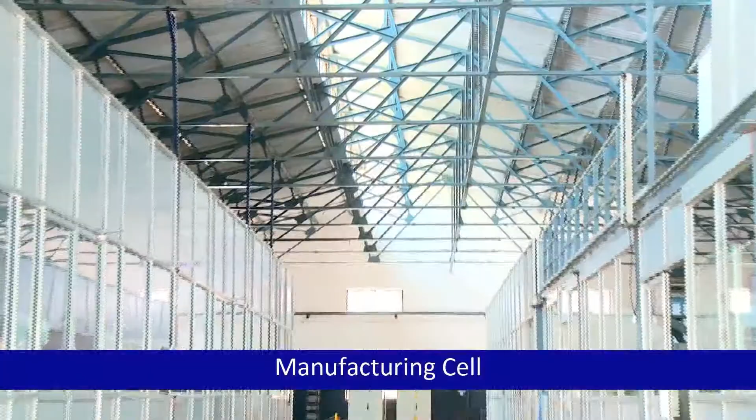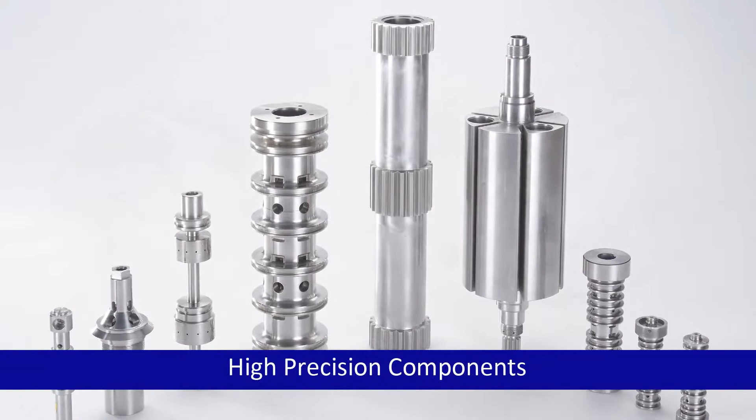Since its inception, ATC is the trusted partner for ISRO in all the PSLV, GSLV, Chandrayaan, and Mangalyaan missions, and a feather in our association: we are working for the prestigious India Maiden Human Space Program, Gaganyaan.

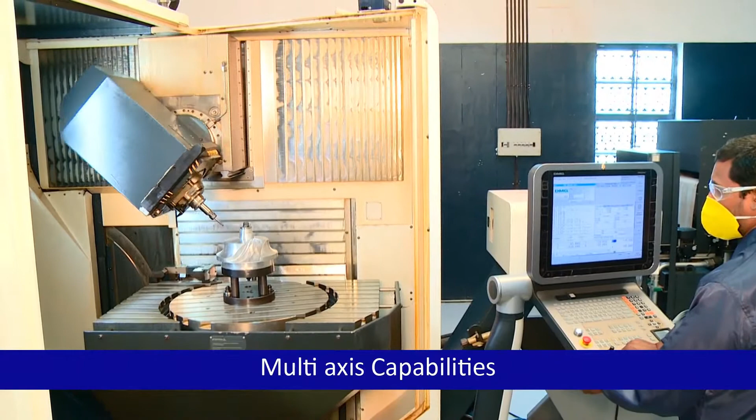Established in manufacture, special process, assembly and testing to produce motors, actuators, control valves, sensors, solenoids, and power takeoff shafts.

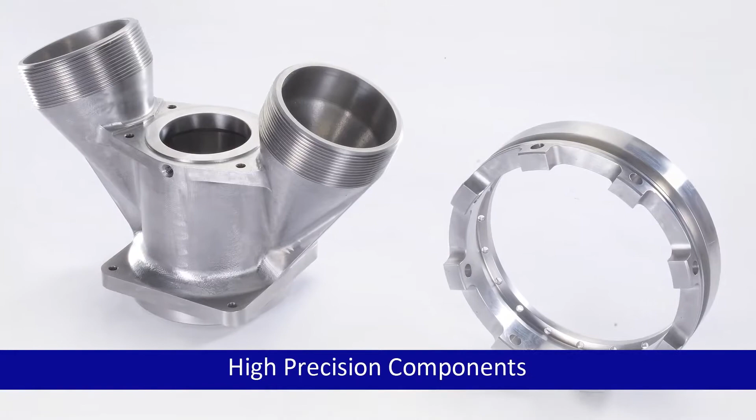The latest venture into manufacture of gimbals for electro-optic payload and retractable landing gear systems for UAVs set a path to become a system integrator.

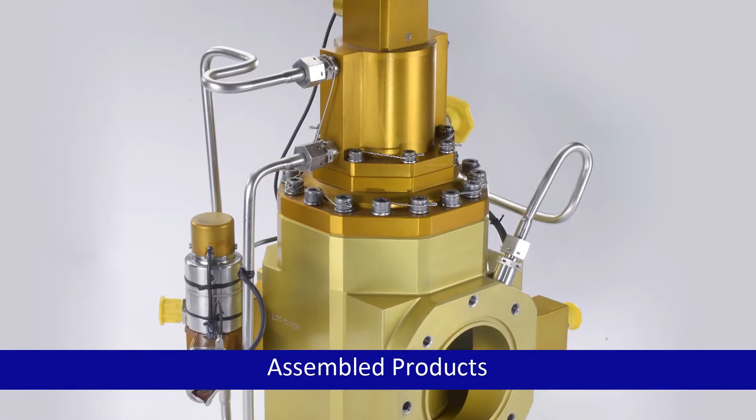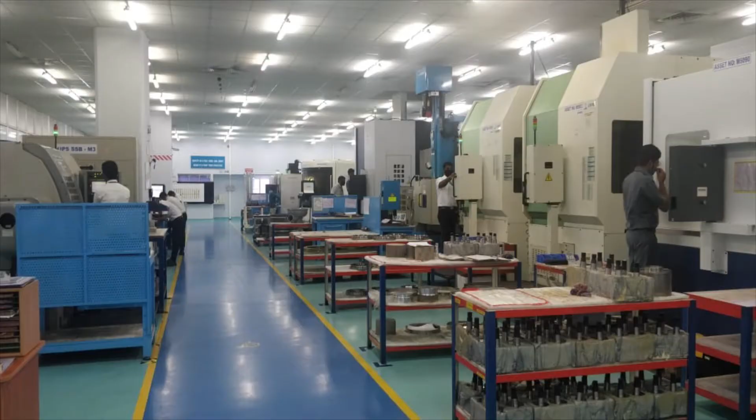In 2010, LMW ventured into the aerospace industry, leading to the birth of a new division, Advanced Technology Center, a one-stop solution for the aerospace sector meeting world-class standards on quality assurance, certified by international quality agencies to serve the aerospace and aviation industry.

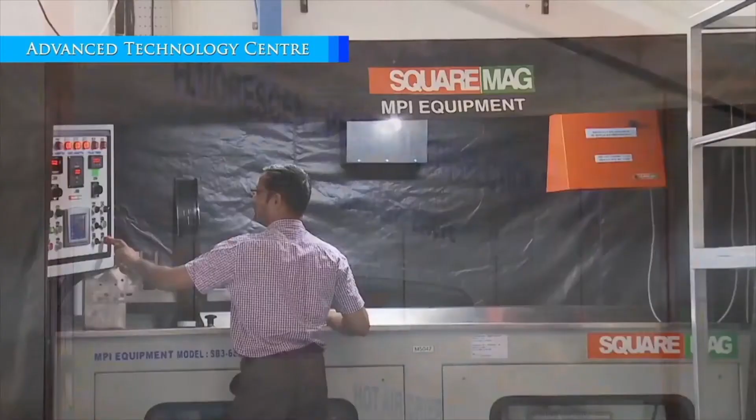Manufacturing precision machine parts for engine, structural, sheet metal components and sub-assemblies, with an added valuable special process for surface treatment.

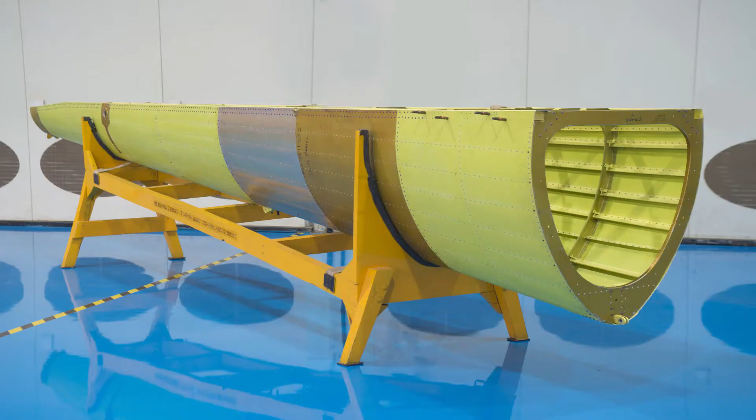LMW is progressing in its foray into aerospace by establishing a vertical for composites at its Advanced Technology Center to complement the manufacturing infrastructure for metallics.

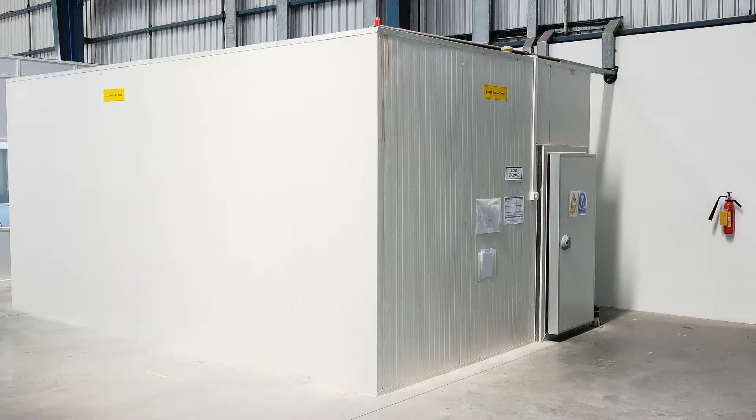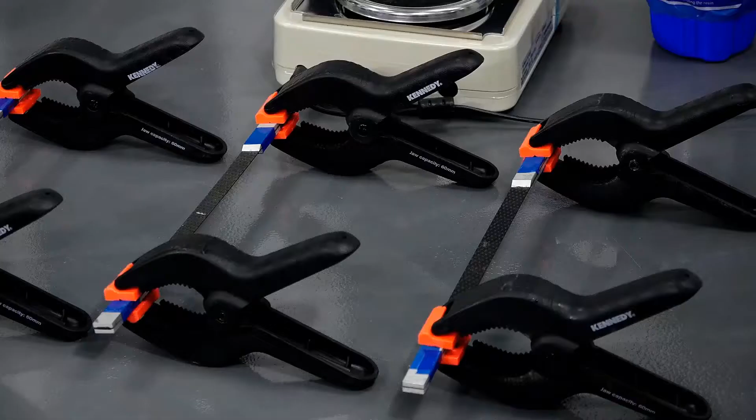The perfectly integrated state-of-the-art facility will put LMW in the Premier League to design, develop, analyze, qualify and manufacture very demanding aerospace composite structures. A unified approach to build the facility, a competent team and an effective quality management system has amalgamated all the requirements.

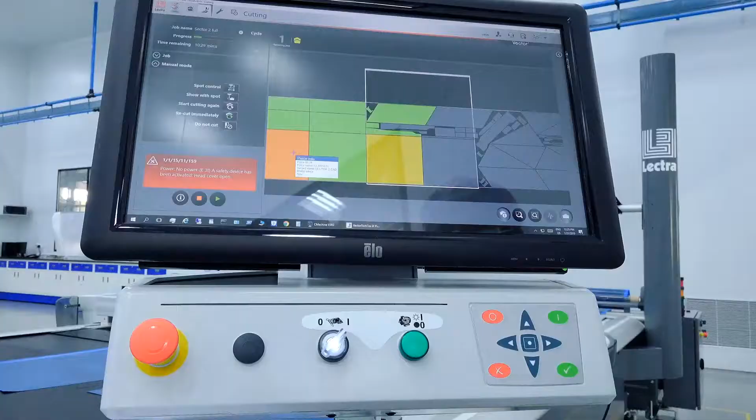This has brought forth an ideal environment and work culture to meet the expectations of AS 9100 and NADCAP standards.

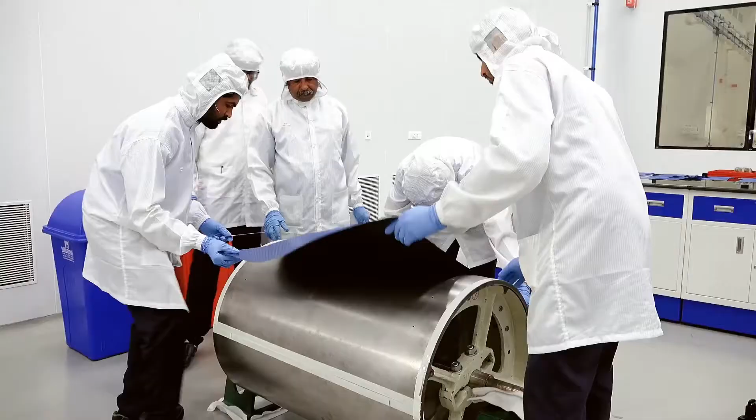A CNC pre-preg cutting machine is deployed to prepare the layup kits. Two clean rooms of ISO Class 8, one of which is convertible to Class 7, are maintained in ideal conditions for layup activities.

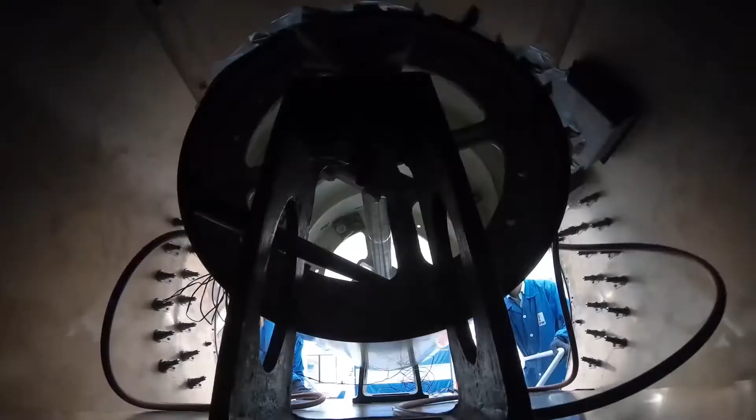Two autoclaves with a computerized control system will assure precise execution of curing cycles.

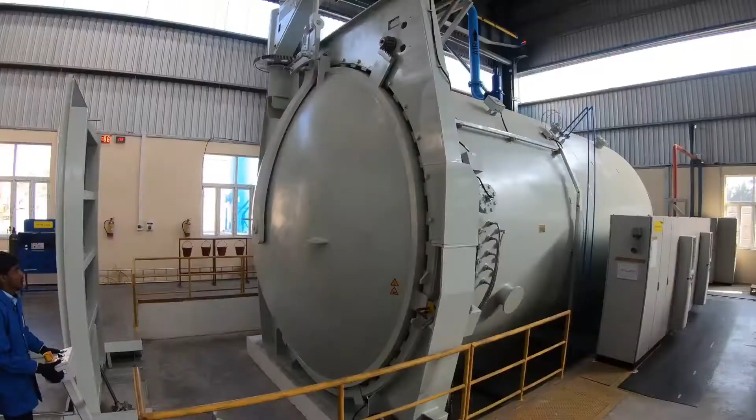A universal testing machine of 100 kN capacity and ultrasonic A-scan form part of the quality monitoring activity.

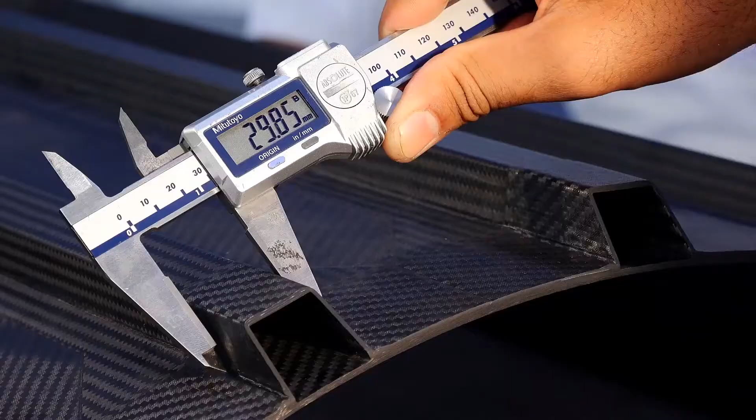The facility has a high bay for assembly of large composite structures for launch vehicles and aircraft.

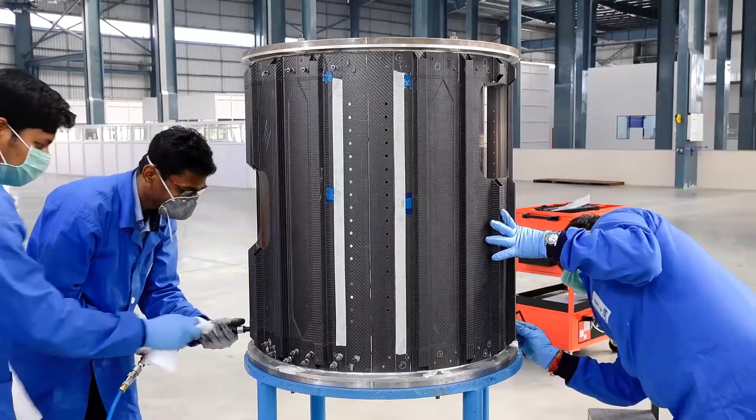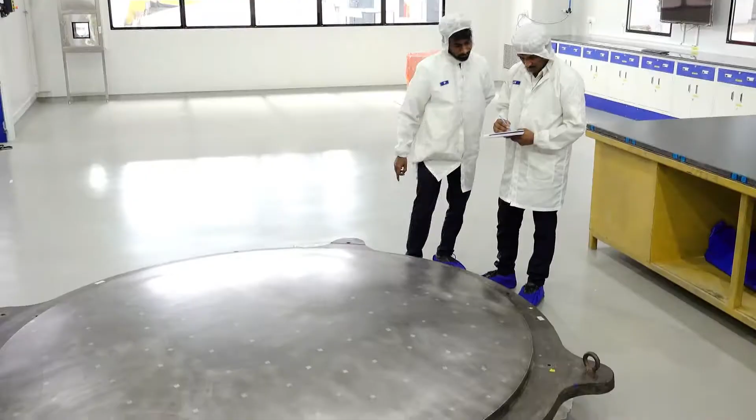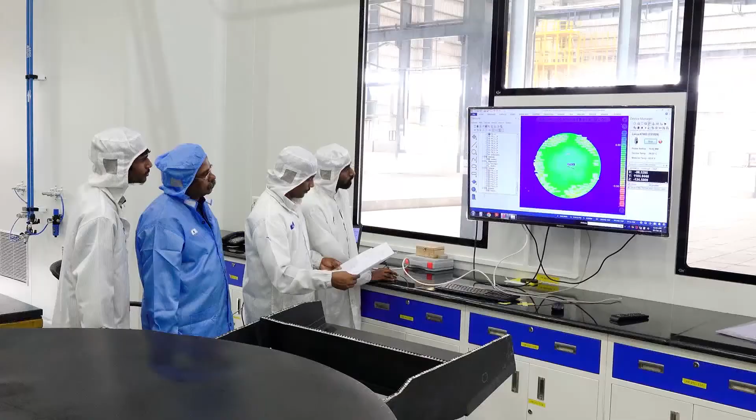The team has evinced its potential by realizing diverse and demanding composite products. Notable among them is a deployable CFRP-shaped antenna reflector for communication satellites, requiring high-profile accuracy and stability under thermal and inertial loads. Translation of crucial design aspects into product and methods to achieve and measure the profile accuracy has been mastered by the team. The dish is of sandwich construction.

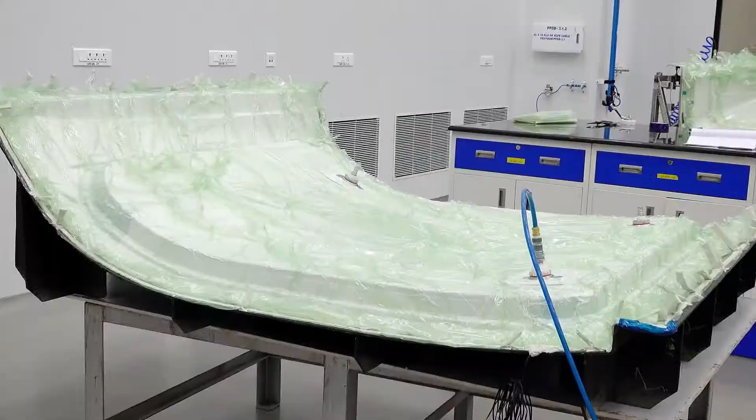Hindustan Aeronautics Limited, the premier organization in India to build aircrafts and helicopters, has engaged LMW to produce complex and intricate contoured structural components for its advanced light helicopter.

These components are processed in a well-controlled environment by vacuum bag molding method and subsequently cured in autoclave. One of the typical components is the cowling panel assembly top engine, a partially sandwich construction.

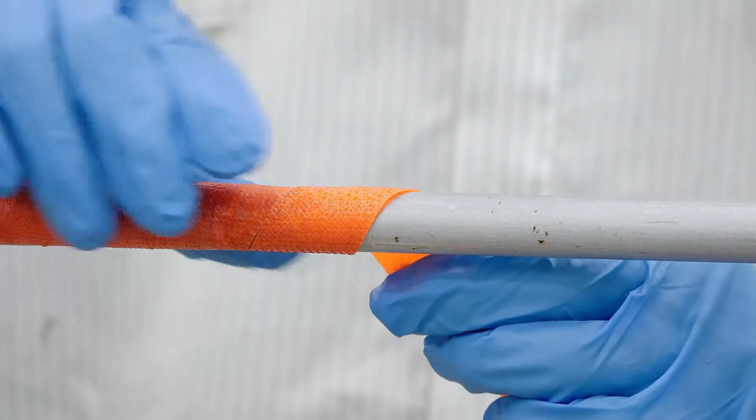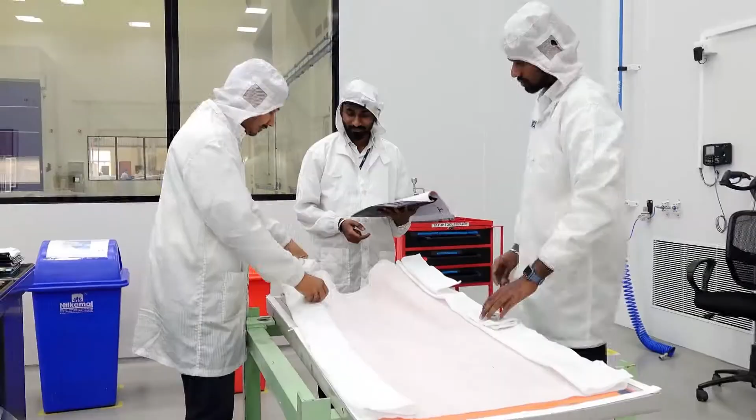Other typical components are the seal support for the door assembly and the cowling panel, which is again a combination of sandwich and monolithic construction. Concurrent with the processing of such components, test laminates are also processed to extract control coupons and verify the quality of processed components.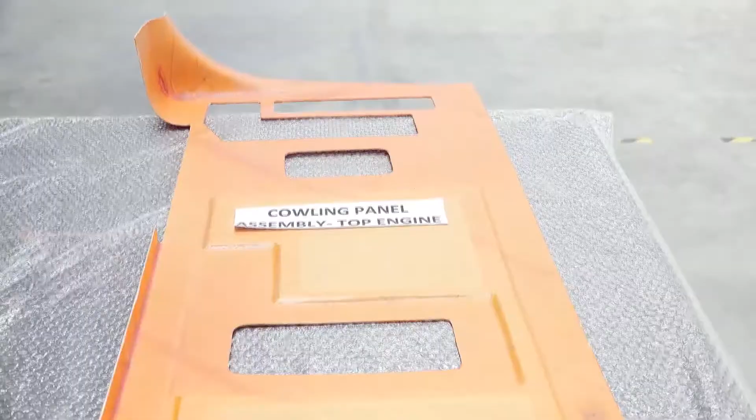A glimpse of the finished products like cowling panel assembly top engine, Kevlar tubes, cowling panel assembly controls, and a seal support assembly for the door stands testimony to the finesse of the workmanship.

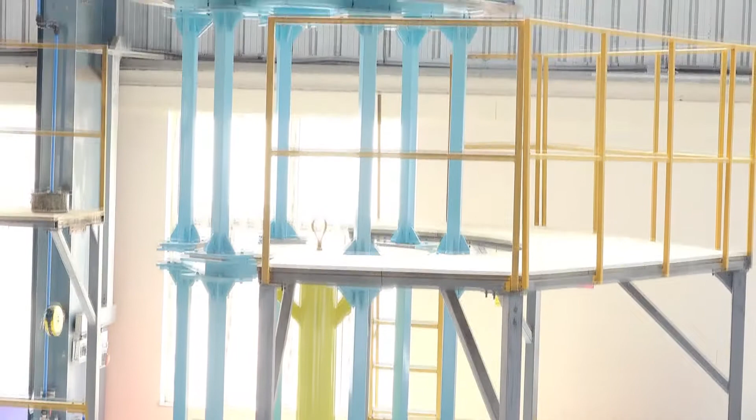The metallic sandwich cylinder for the small satellite launch vehicle is being developed for ISRO. The panels of the shell, using thin aluminium sheet as a skin and aluminium alloy honeycomb core, have been molded and cured with due surface treatment.

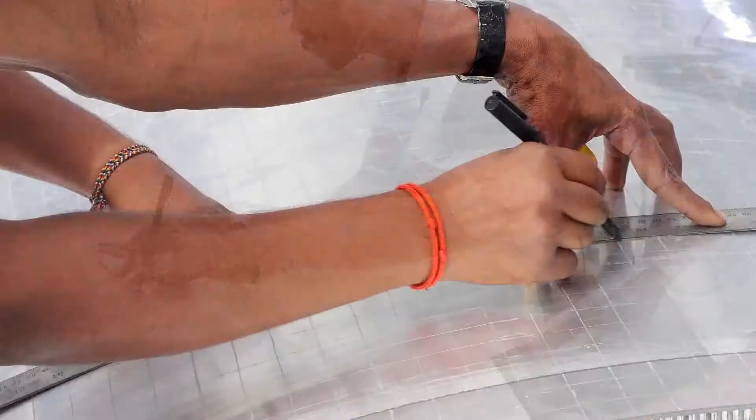Segmented cylindrical panels are subjected to non-destructive evaluation and trimmed to suit the assembly. The assembly has been realized with splicers connecting the cylindrical segments being fastened to the end rings.

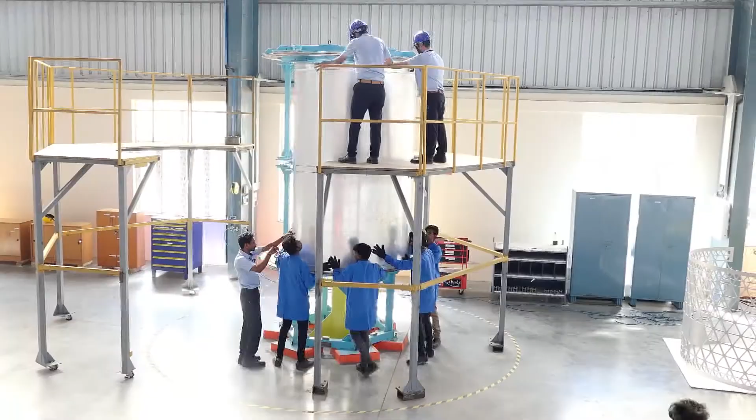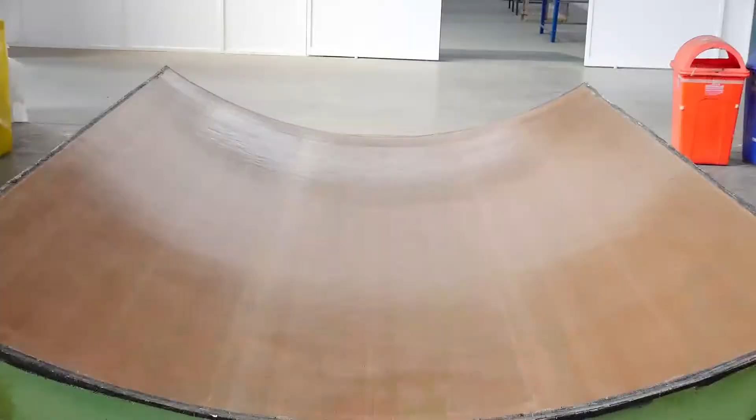Another major highlight of the activities currently at LMW is the realization of composite payload fairing for GSLV Mk3, India's largest launch vehicle. This activity involves design and manufacturing of composite toolings, the processing of sandwich panels of different configurations, and their assembly into two halves of the payload.

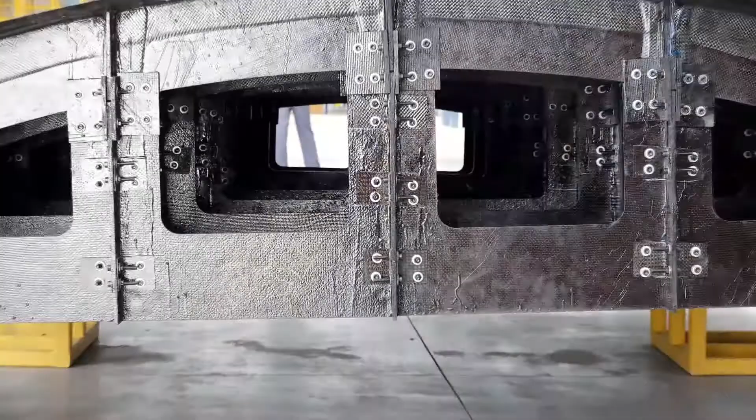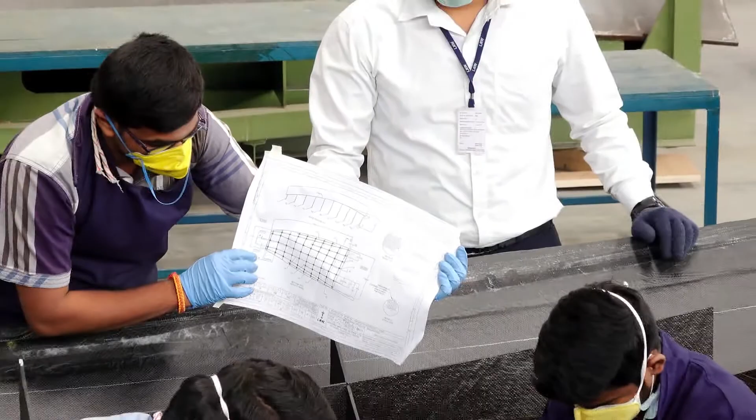The composite tools for realization of panels for the cylindrical segment of the OPLF has been realized in-house and inspected for its surface accuracy. Similarly, the composite layup tool for the ogive segments of OPLF is also being built up in composites. The panels realized using these layup tools will be trimmed and assembled as payload fairings using the assembly jig.

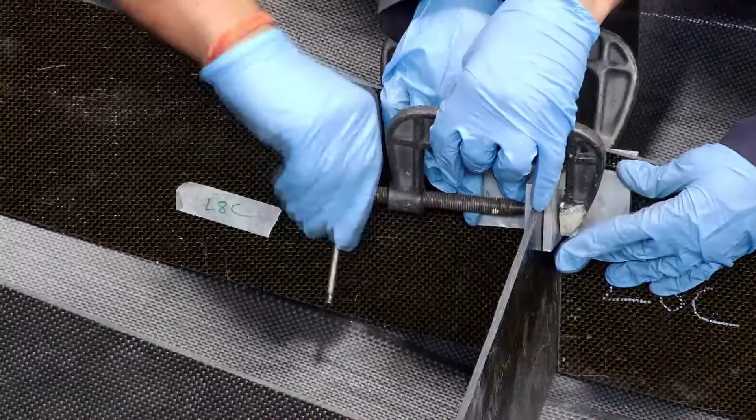The diversity and complexity of the products being realized at LMW has raised expectations of potential customers. The facility will be further augmented by installation of a hot air oven, and a CNC machining center.

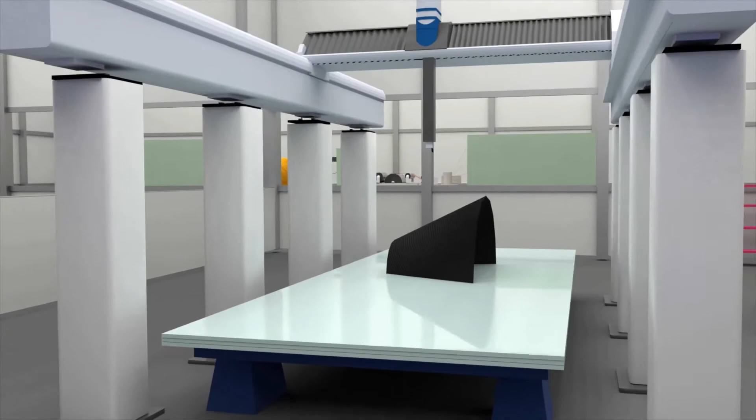CNC 3D CMM and C-scan system for NDT will meet the rising demands and expectations of customers. Filament winding is identified for expansion of composite processing capability, and fiber placement is envisaged as a futuristic growth path.

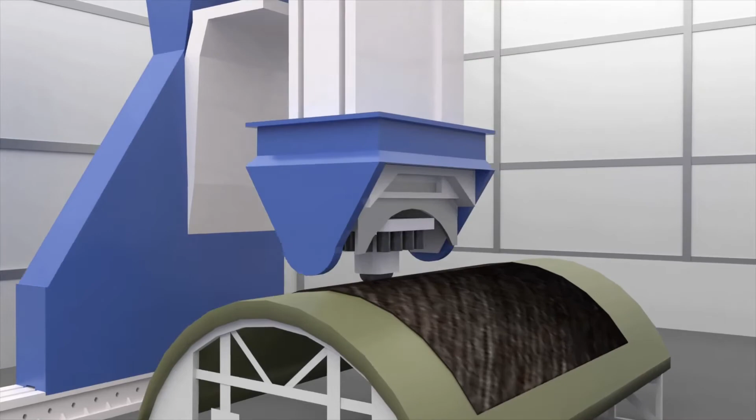Well-streamlined operating procedures are implemented right from raw material acceptance to the final product acceptance. Real-time data logging will ensure comprehensive product history and traceability.

LMW is determined to evolve as a key player in the aerospace composites arena with its characteristic business ethics and customer orientation.